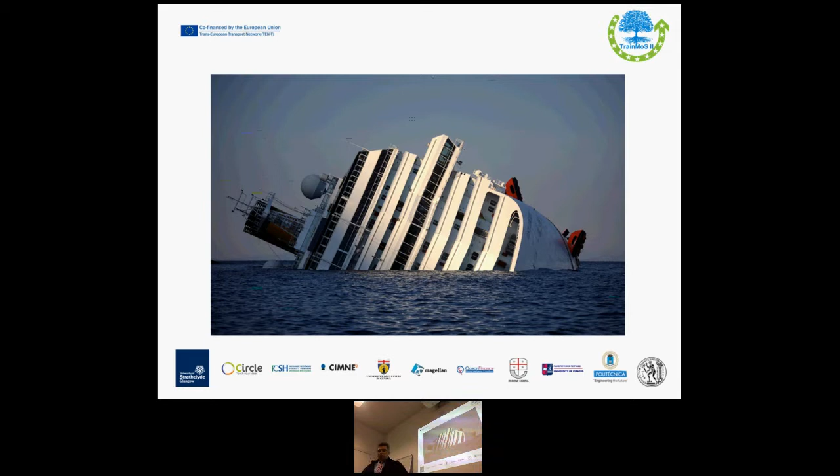In January, the new harmonized probabilistic rules for damage stability became mandatory, and this initiated a new era of rule making in the maritime industry. This actually constitutes the culmination of more than 50 years of work, one of the longest gestation periods of any other safety regulation.

This can be characterized as a step change in the way safety is being addressed and regulated. Taking our time is justified in this case. The change from introducing the new probabilistic rules for damage stability is also fundamental, and it has a lot of design implications which are just beginning to register, driving home the realization that things are no longer the way they used to be.

So these are some of the changes we will see come, and this is what we are going to discuss in detail today. So why damage stability and the behavior of the vessel after damage is important?

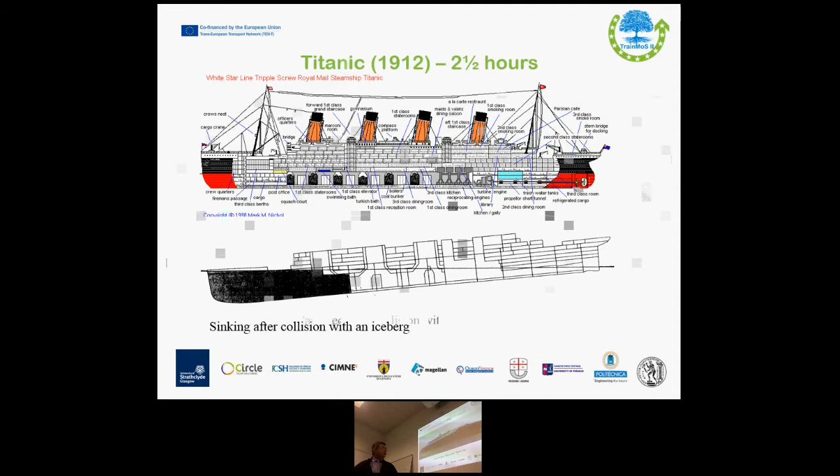In this case, we had the rupture of the hull for more than 4 compartments, and this caused the slow sinking of the vessel. Then in 1956 we had the Andrea Doria, which took 11 hours to sink.

This vessel capsized after a collision with the Stockholm freighter, a cargo ship. Then in 1982, we had the tragic accident of the European Gateway, which took just 10 minutes to capsize after colliding with the Speedlink Vanguard.

This actually showed that these vessels, which have ro-ro decks, are very prone to rapid capsize, and something has to be done in order to save people. In those cases, we need proper design because it's impossible to evacuate the vessel in 10 minutes.

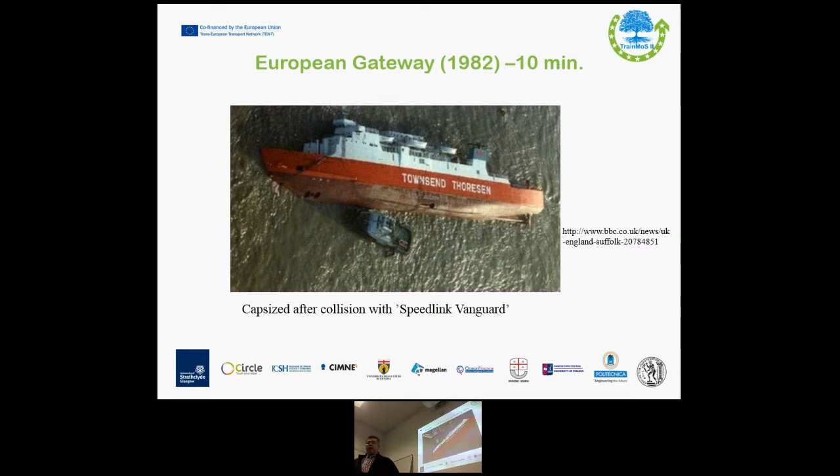Things got even worse. In 1987 we had the Herald of Free Enterprise: from the moment water came into the car deck from the bow door, the vessel was otherwise intact. There was no collision, just water coming in from the bow door, which was left open, and this caused the rapid capsize of the vessel in just 90 seconds.

A few years later, an accident which was also very important for safety and paved the way for new regulations was the Estonia. It happened in September 1994, and it took less than 15 minutes after flooding of the ro-ro deck for this vessel to capsize very rapidly.

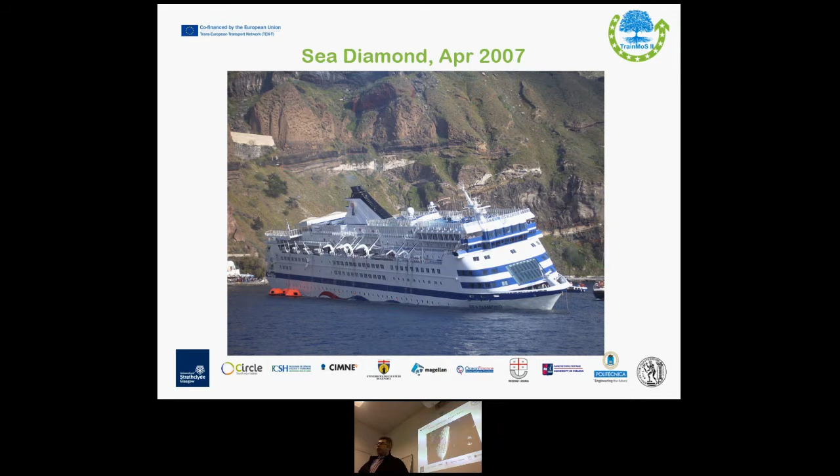And this was another link in the chain of accidents underlining the requirement for better damage stability requirements and better design in order to avoid the consequences of flooding.

So if we go a step back and look at the background, we see that ships, obviously, during their operation may suffer damage, so we cannot avoid this. There is a probability that some of the ships sailing out there will at some point in their life have some kind of damage. Hull damages can be caused by collision, grounding, or enemy action in case of warships.

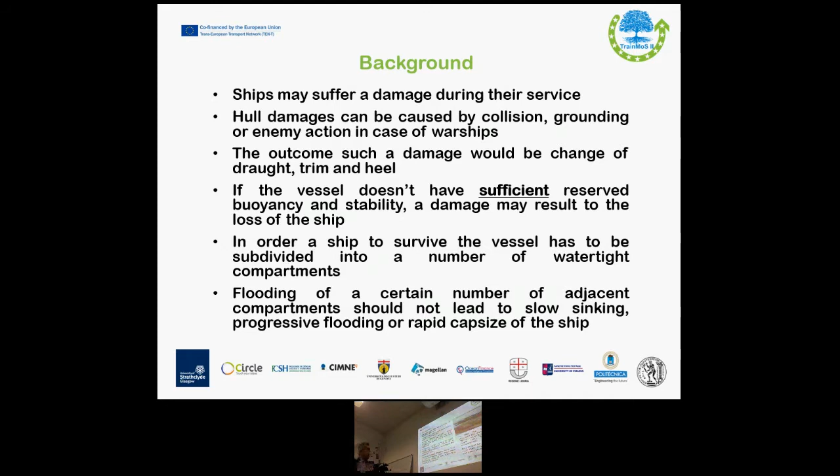If we go back and see when we first understood that watertight subdivision is very important, we will go back more than 1,000 years, because the Chinese junks, which were ocean-going vessels, had already identified the need for subdivision. According to present data, they were subdividing vessels since the 12th century.

The Great Eastern, built by the British engineer Brunel in 1858, was advanced in many different aspects. It was not only watertight subdivided with transverse bulkheads, but it was actually constructed as a double hull, so it was much more advanced in damage stability than other ships in the same era.

At the end of the 19th century in Great Britain, the Parliament chartered a bulkhead committee to investigate the impact of transverse bulkheads, but the first Merchant Shipping Act in 1854 is the first known legal requirement addressing safety at sea concerning watertight bulkheads. In 1891, the bulkhead committee proposed installation of transverse bulkheads in order to make ships longer than 425 feet meet a two-compartment standard. So if there was a breach or damage to one transverse bulkhead, the vessel would still be able to stay afloat.

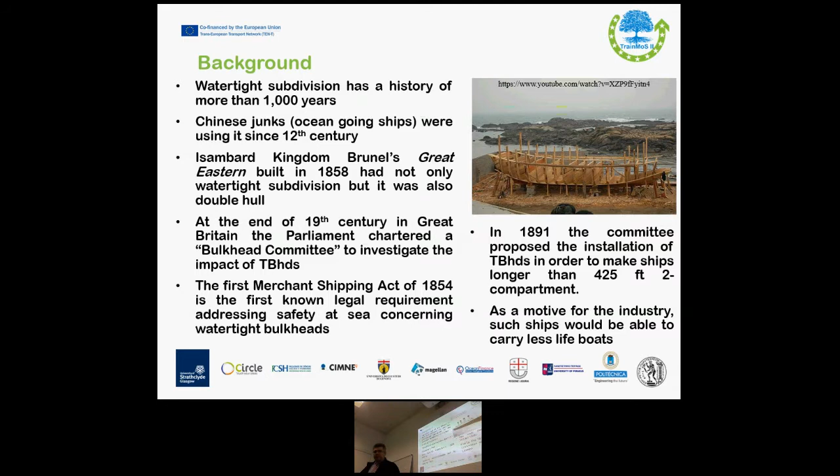The tragic loss of the Titanic in April 1912 stressed the need for international regulations for the watertight subdivision of the hull, and this was covering also the extent up to which the watertight bulkheads were extending.

The problem was, if you see the black, all the sides of the vessel were painted in dark colors, and the reason for this was that these vessels were using coal as fuel. So coaling and refueling, while the vessel was in port, required the coal to be transferred from openings on the sides of the vessel into the stores where it was kept until used.

So you can imagine if it was a light paint outside, what the coal during coaling would cause, how dirty it would look. That's why you see that most of the vessels of that era were using very dark colors for the hull.

So these openings for refueling with coal were one problem for extending the transverse bulkheads to the main deck. There were other issues too. The vertical extent of the bulkheads was an issue which proved to be critical for the Titanic accident.

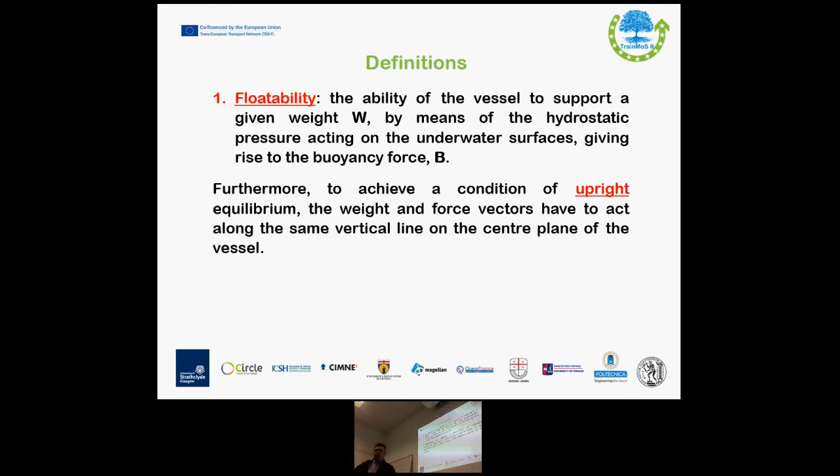Therefore, to achieve a condition of upright equilibrium, the weight and buoyancy force vectors have to act along the same vertical line on the center plane of the vessel. This will give us the equilibrium.

The hydrostatic stability is the ability of the vessel to return to the upright condition in still water when it is disturbed from it. This is a necessary condition: the vessel must have a positive metacentric height.

This is depicted by naval architects as GM. If GM is positive, this is the way to make sure that the vessel has the ability to return to its upright position at small angles. That's why a positive GM is the small angle, initial stability requirement.

If we go to larger angles, then the measure we use as naval architects is the righting lever GZ, and its variation with increasing heel provides a better indication of the hydrostatic stability characteristics of the vessel.

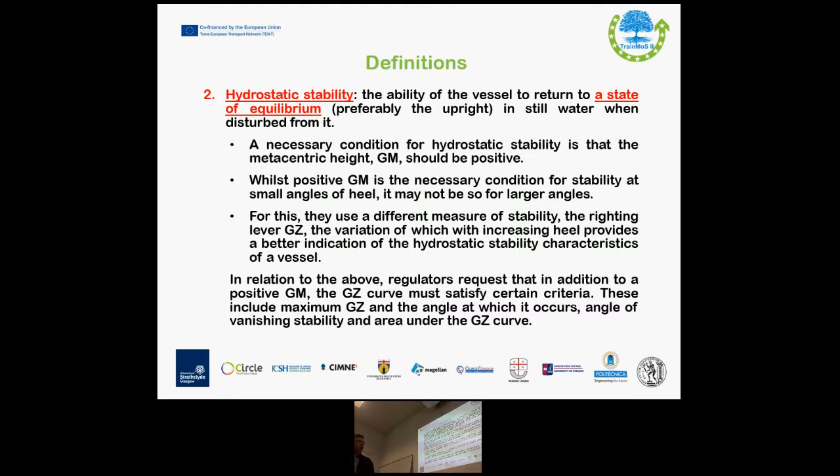So the GZ curve is very critical for the stability of the vessel. If the vessel is damaged, losing part of her internal volume and flooded, she will sink, heel, and trim until she reaches a condition in which the reserve buoyancy, that above the water line, is brought into effect to offset the lost buoyancy, until equilibrium is restored, so that buoyancy and weight are again equal.

For the most onerous damage cases, the GM is likely to decrease and the GZ curve characteristics are likely to diminish in all regards. The vessel will capsize if GM becomes negative while upright, and there are no positive righting levers in the residual GZ curve.

So GM on its own being negative means that the vessel will tend to find an equilibrium away from the upright condition. That means that if we have a GZ curve crossing the horizontal axis at an angle of, say, 2-3 degrees, the vessel will not have an equilibrium at 0 degrees, but will roll between minus and plus this crossing point.

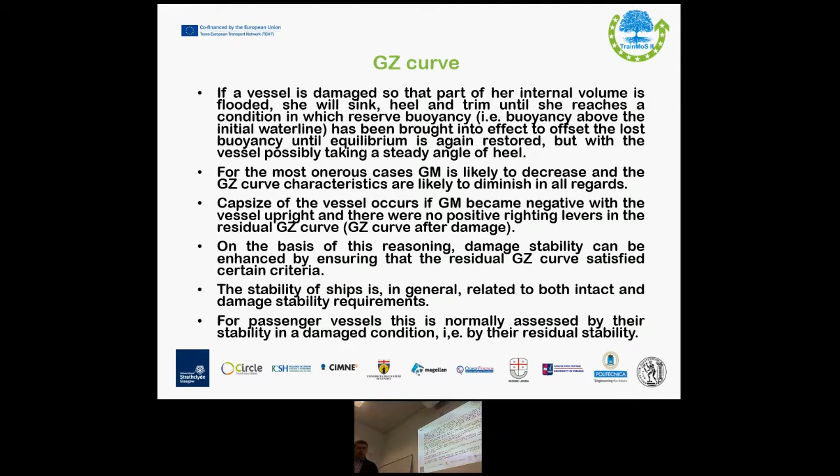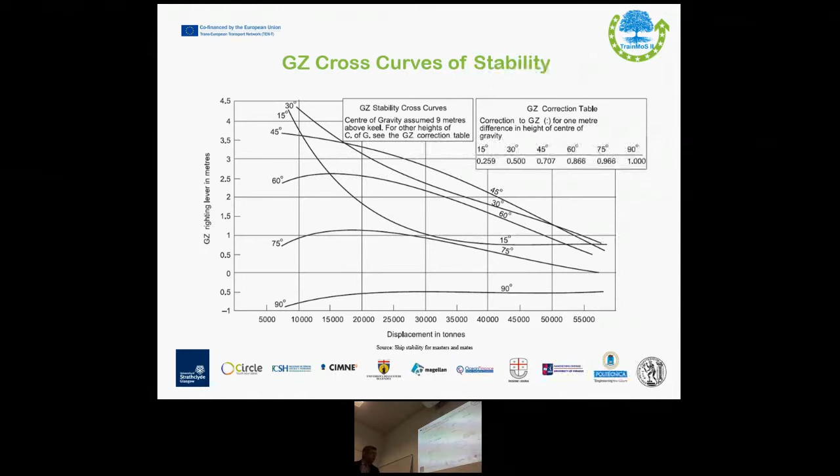If the GM was negative, it could still happen that the 7 degrees rule was satisfied in some cases. If we had asymmetric condition, then we had 15 degrees as the requirement for one compartment damages. If we had 2 compartment or 3 compartment damages, then we could go up to 12 degrees of heel for this inclination. There was no requirement for the area or the maximum value of the GZ phi, so it was only GM.

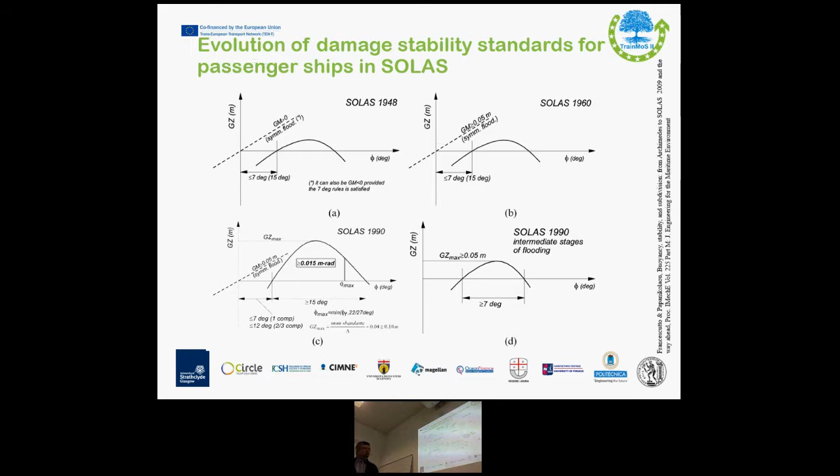The other definitions which we need to have in mind are the watertight bulkheads, the bulkhead deck, the margin line. Actually, the watertight bulkheads are all these boundaries with which we subdivide the watertight envelope of the vessel in the transverse or longitudinal direction. The bulkhead deck is the deck up to which the transverse bulkheads are extended, and the margin line, which was used during the previous deterministic regulations, is a line which is 76 millimeters below the deck at side.

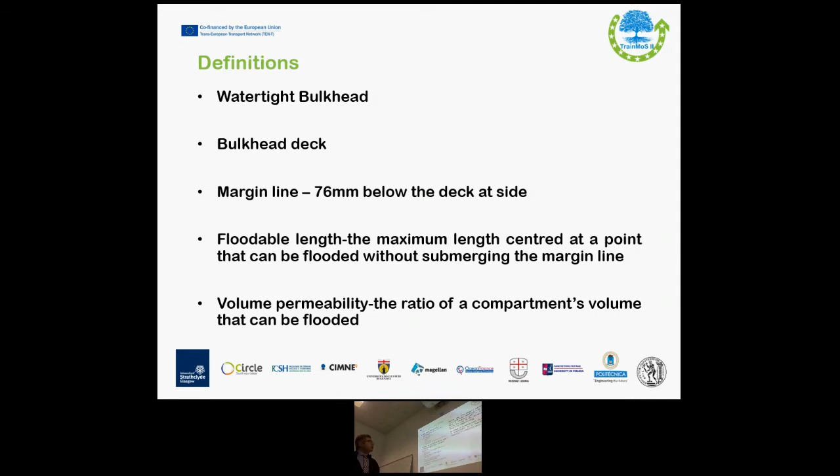For the watertight subdivision, we know that the vessel may sink. It's carrying more weight than her displacement, so there is no balance in the vertical direction. There is flooding due to grounding, collision, enemy action, or operation of a system open to the sea.

So if we have some switches and the valves are open and there is progressive flooding of the engine room, we may have a problem. For case...

When the water finds its way in, the designer has to make sure that the loss of transverse stability is minimum, the damage to the cargo is minimum, the vessel has sufficient longitudinal stability, and the loss of residual buoyancy is minimum. Ideally, the vessel should sustain more and more flooding without loss of stability until it sinks bodily by loss of its reserve buoyancy.

So this is the fail-safe case. If we cannot save the vessel, we should make certain that it will not lose its stability rapidly and capsize, because that means the number of fatalities will increase. To achieve this, the ship is subdivided into a number of watertight bulkheads, watertight compartments. This is the ideal way of sinking - if we cannot save the vessel, it should go down low.

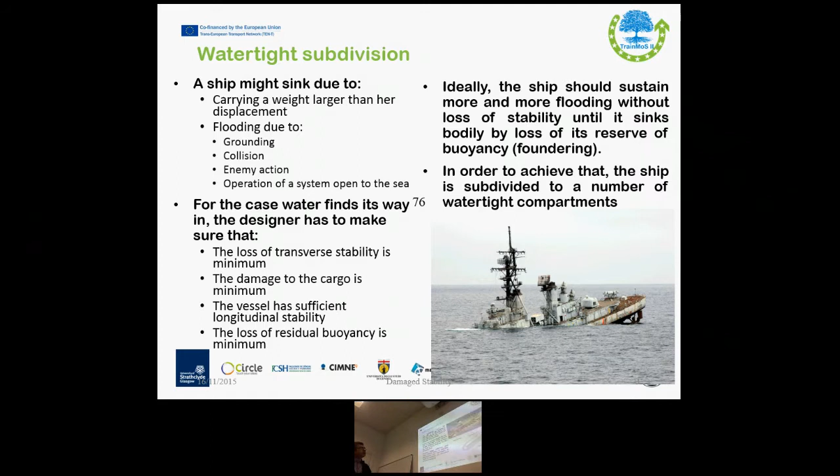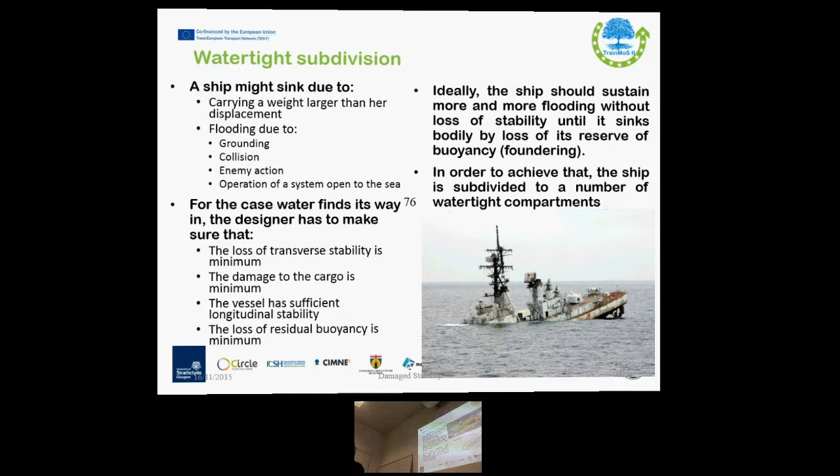For the subdivision, the bulkheads must be watertight up to the bulkhead deck and able to withstand the water pressure when subject to a different waterline from that of the intact vessel. So if the water level in a compartment increases, the bulkhead should have sufficient strength.

Ships over a certain length should have a watertight inner bottom, extending from the forward collision bulkhead up to the aft peak bulkhead. For tankers, large warships, and many ro-ros, we have in addition longitudinal bulkheads in order to minimize the transverse extent of flooding. So we have this in some vessels.

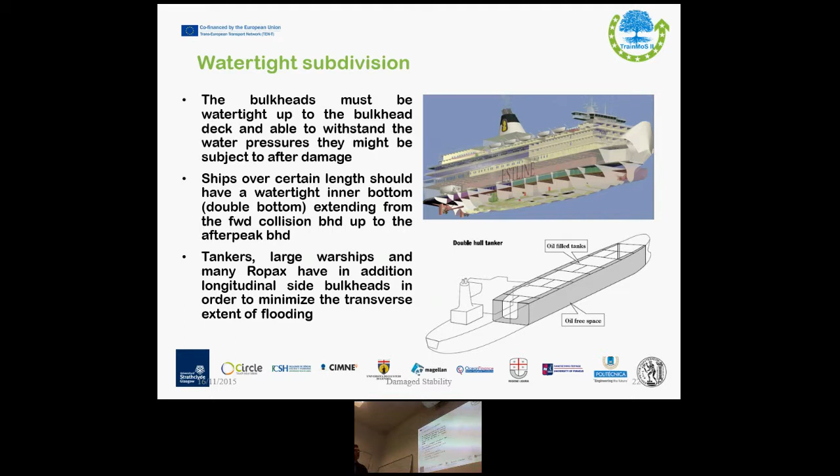So, to assess the ability of the ship to withstand damage, a number of damage scenarios should be checked at the design stage. For every damage condition, the naval architect is checking the damaged waterline, the heel and trim of the vessel, and the damage stability according to the standards laid down by the rules. When the ship is damaged...

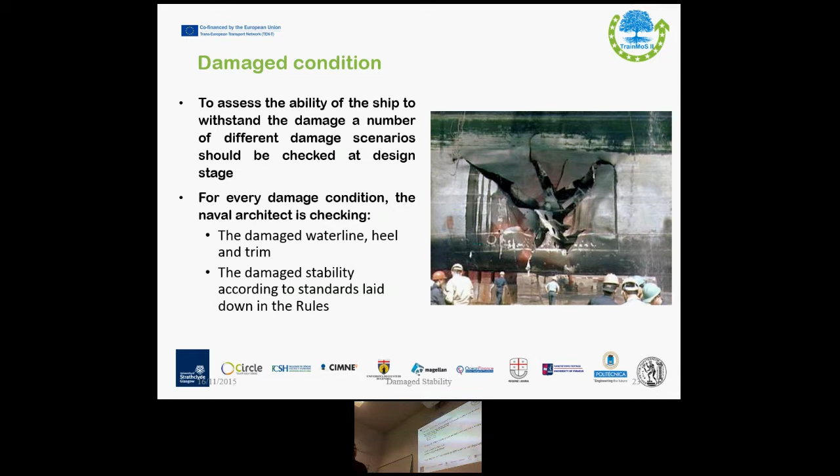The water enters, and this results, as we said, in increase in draft, change in trim, change in heel. The result of this flooding can be determined by two ways - that's what we are using in naval architecture.

We have the lost buoyancy method and the added weight method. The regulations usually rely on the lost buoyancy method because this is a constant displacement method - we assume that the vessel is losing buoyancy, but the weight stays the same. This is much easier in order to use all these non-dimensional indicators which we have.

Also, because GM is a moment, and it comes from the heeling moment, the righting moment - if we have moments, we have to divide them by a weight. If the weight changes, then we will get different numbers for the GM, and this will make things much more complicated. So we are using the lost buoyancy method.

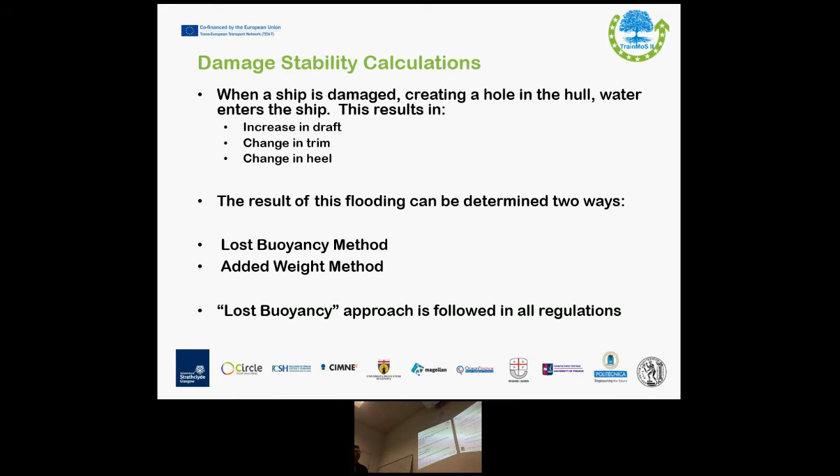And this is a very simple example in order to understand how it works. This was first presented in the handbook of ship design, the German Handbuch der Werften, and it's also used by Watson. The starting point is, we have a barge, and the starting point is the intact condition of the barge.

We see with 0, we indicate the intact hull, and the original draft is T0. Then we have, at this draft, the volume of the barge is V0, and associated with the initial intact stability, we have the GM at this intact condition, which is by definition KB plus BM minus KG.

So these are the metacentric radius, the vertical center of buoyancy, and we subtract the vertical center of gravity.

After the damage, we have a hole. So this buoyancy, which existed underneath the initial draft, instantly is lost - this part is not contributing to the buoyancy of the vessel anymore. So the draft has to increase.

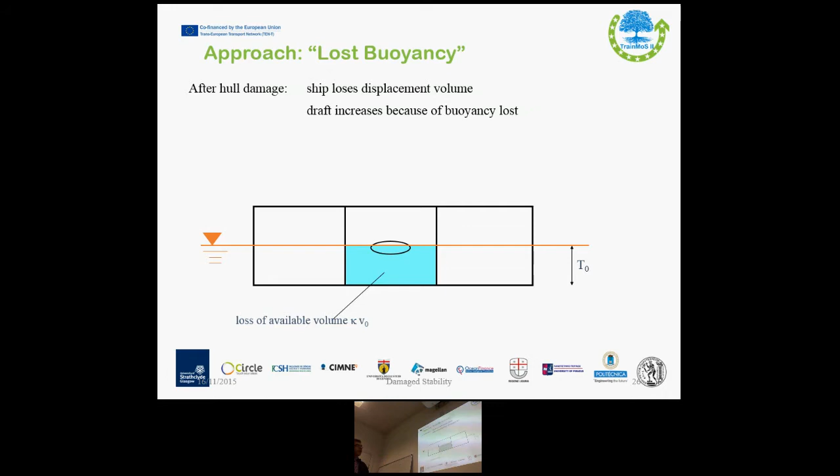So the lost volume is κ, which is the permeability times V0, the volume of this compartment. The flooded compartment does not fill completely with water because the compartments usually contain equipment, furniture, structural components, or cargo, and this is why we have the permeability, which is defined by the available volume to be flooded divided by the total volume which the compartment has.

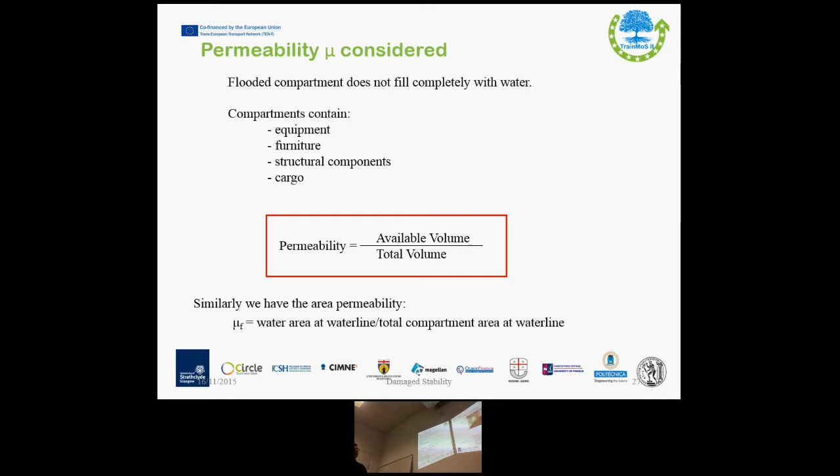Let's say, ideally, if it was free of all these obstacles. Similarly, we have the area permeability, which we use sometimes for the waterline calculations. So the assumption in the calculations usually is that we have a homogeneous permeability to the vessel - let's say if we had an empty room, it would be just the walls, no obstructions there.

In reality, we have permeability of 95%, let's say, in this room, but inside we have furniture, and there is a different distribution vertically. If you have a water line where water steps in, the permeability of the lower spaces is different from the permeability at the upper part of the compartment. Our model suggests that we have this homogeneously, so in all the different heights of the compartment, the permeability will be the same.

The typical values are shown in this table. For a merchant ship, it's 95% for the compartment. The accommodation space is 95%, since these are empty spaces. For machinery spaces, typically we have 85% of the total volume available for flooding. The dry cargo space is 70%, and bunker stores and cargo holds are 60%.

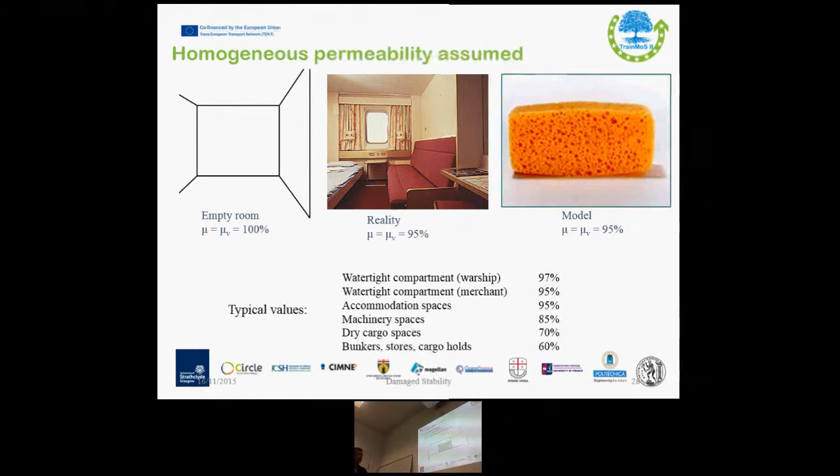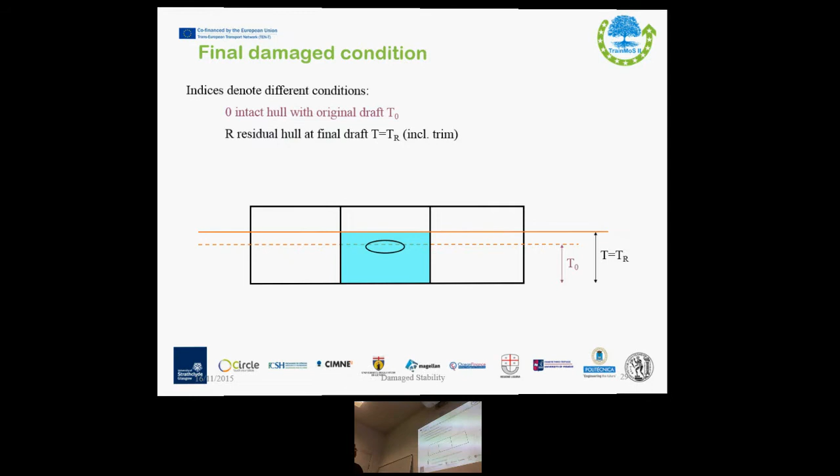In the final damage condition, due to this opening we lose some buoyancy, so the draft will increase. We could even have some trim if this was not a symmetrical condition. In this case, let's assume a symmetrical damage in the longitudinal direction that extends from one side to the other, so there is no heel and no trim. The intact draft at the final condition can be an artificial intact damage condition, used for mathematical derivations, but it has no actual meaning—it's something we need to use to come up with the numbers for the calculations.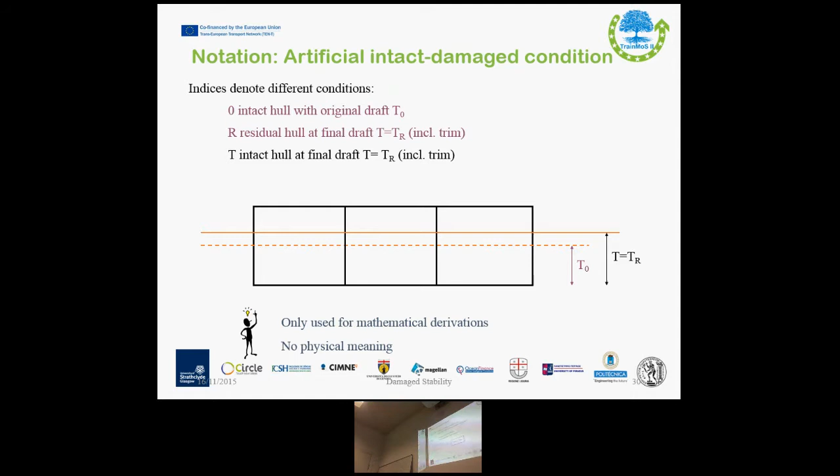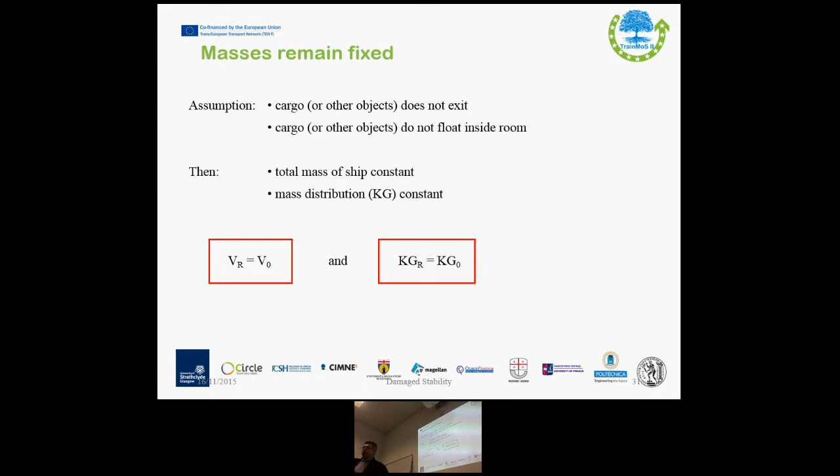The masses are fixed—this is an assumption we have. The cargo or other objects will not exit, and the cargo or other objects will not float inside the room. These are assumptions in the damage stability calculations, and the total mass of the ship is constant, meaning the mass distribution will also be constant. So the volume, the displacement of the weight of the ship needed to find equilibrium, will be exactly the same before and after the damage, and the vertical center of gravity will remain the same. So from the weight distribution, we have no changes.

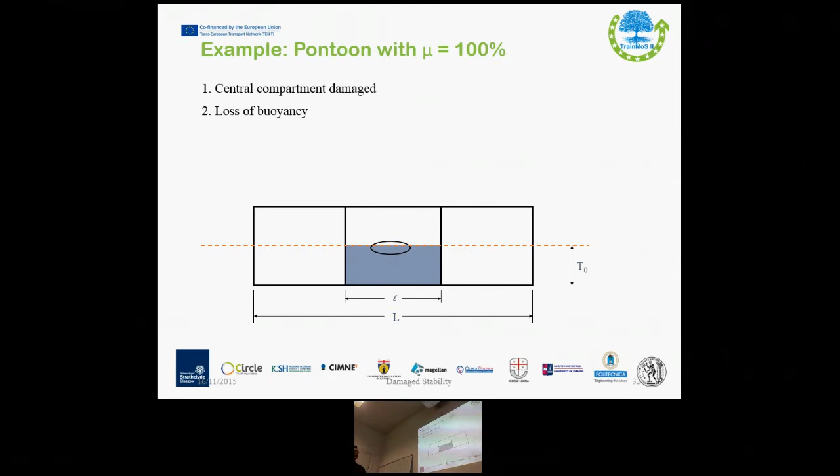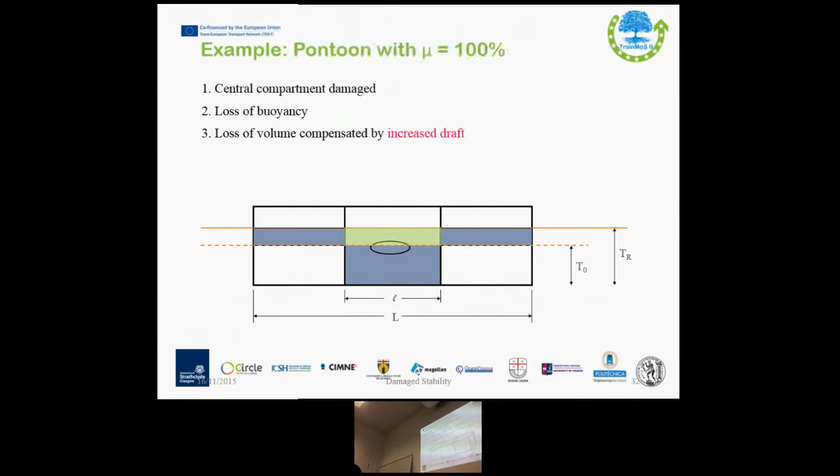Let's see an example with a pontoon with a permeability of 100%. We have the length of the pontoon, the length of each compartment, and the initial draft T0—these are the parameters we need. We have a central compartment damage, and we lose buoyancy, where the lost volume is compensated by the increased draft. Let's see what is actually happening here.

For the intact stability, assume these dimensions for the pontoon: a length of 100 meters, the length of the damaged compartment is 40 meters, the draft is 3, the beam is 20, and the assumed vertical center of gravity is 8 meters. The volume, according to these dimensions, is 6,000 cubic meters. The vertical center of buoyancy is located 1.5 meters above the keel, and BM is by definition equal to the inertia of the water plane area divided by the volume.

For this simple geometry, a rectangle waterline, we can easily calculate the moment of inertia, which is L times the breadth cubed divided by 12. Then we divide this by the volume, which for this box is simply length times breadth times draft. Doing these calculations, we find 11.11 meters. Then we can easily calculate the GM, which with this vertical center of gravity will be 4.61 meters.

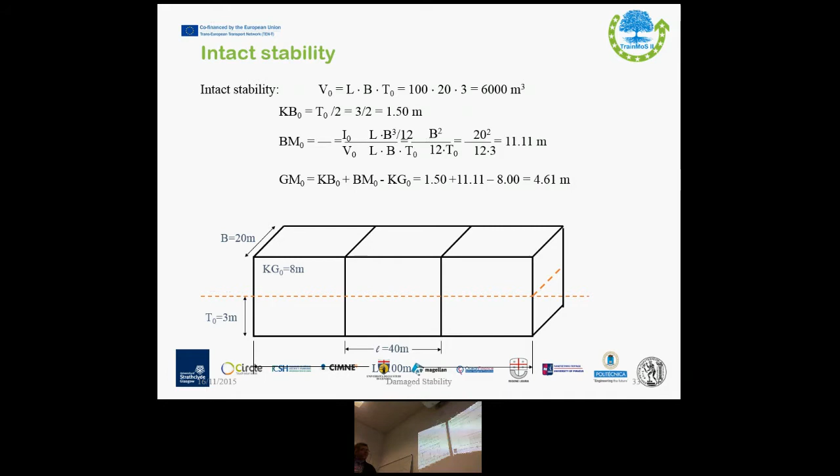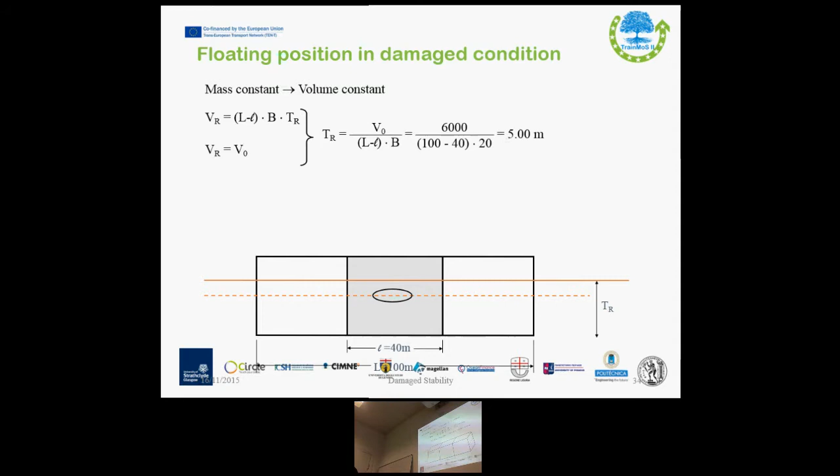With the assumption that the mass is constant, we need the same volume to balance the weight, which means the new draft will be 5 meters. So we started with a draft of 3, and due to the lost buoyancy in the center compartment, we ended up with a new draft after damage of 5 meters.

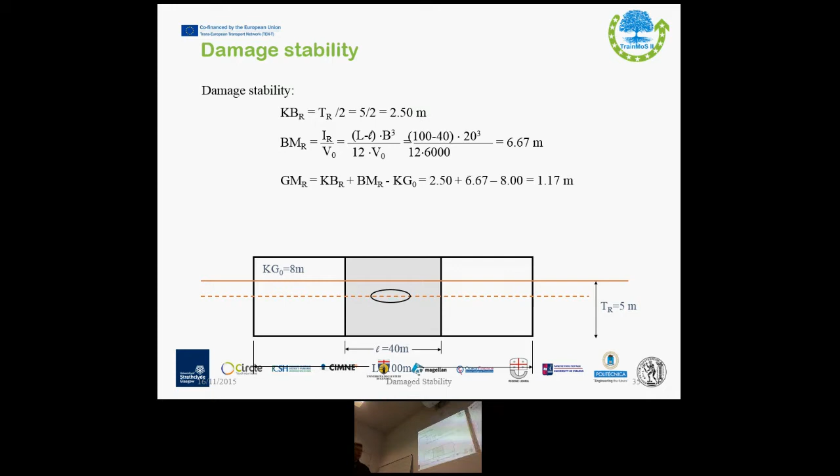If we do the same calculations for the vessel in this damage case, we do exactly the same, but now having lost this central part, the new GM after damage will be just 1.17 meters. This is a comparison: you see very quickly that the pontoon is still stable, but due to this damage, it lost almost 3.5 meters of GM.

Another interesting thing is the intermediate condition, where we have some water coming in. So we haven't lost all the buoyancy here, but part of this damaged compartment is flooded. In this example, we have a height of flood water of 1.5 meters inside the damaged compartment, and at this intermediate stage, the draft is, according to the same calculations, 3.6 meters.

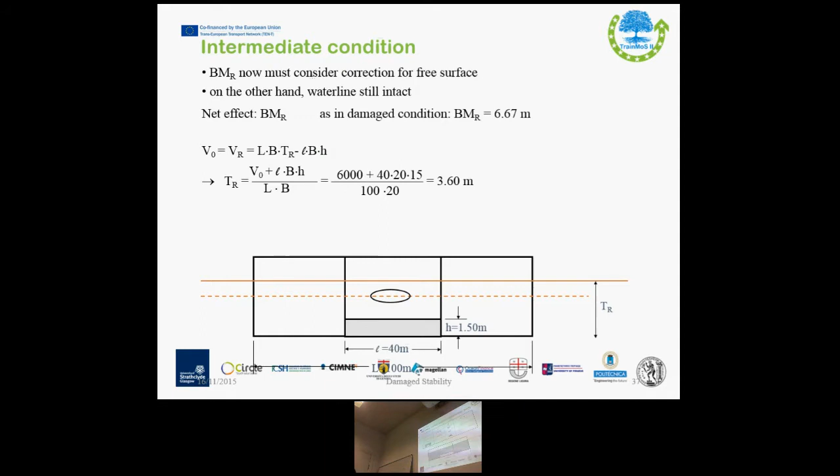If we do the calculations for the various volumes which we have, we can easily calculate the resulting vertical center of buoyancy using the moments. We have the volume, we have the vertical moments of this volume according to the centers we have, and dividing this moment by this volume, we will find the KB, the vertical center of buoyancy, in this intermediate condition.

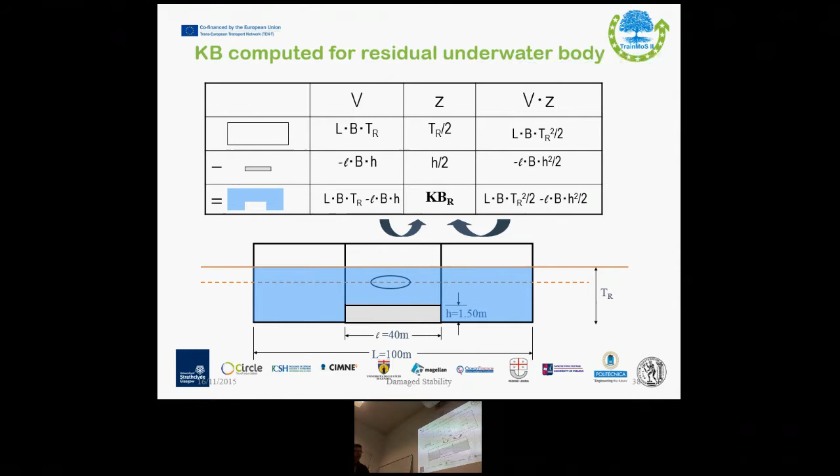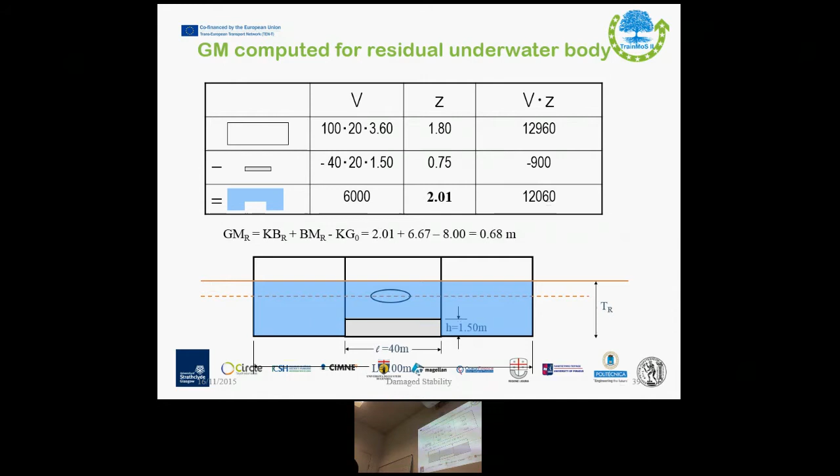Doing the maths, we find that the vertical center of buoyancy is 2.01 meters above keel, and substituting this value in our calculations, we see that the GM is now only 0.68 meters. This is what the comparison shows: the intact vessel started with a huge GM of 4.61 meters. The damaged vessel will end up with a GM of 1.17 meters, but in the intermediate stages we have just 0.68 meters left.

So the pontoon is still stable, but the GM is considerably lower than in the final condition, and the intermediate stages can be more critical than the final. In the old days, the regulations required stability proof only in the final condition. Nowadays, it becomes much more important what happens in the intermediate stages.

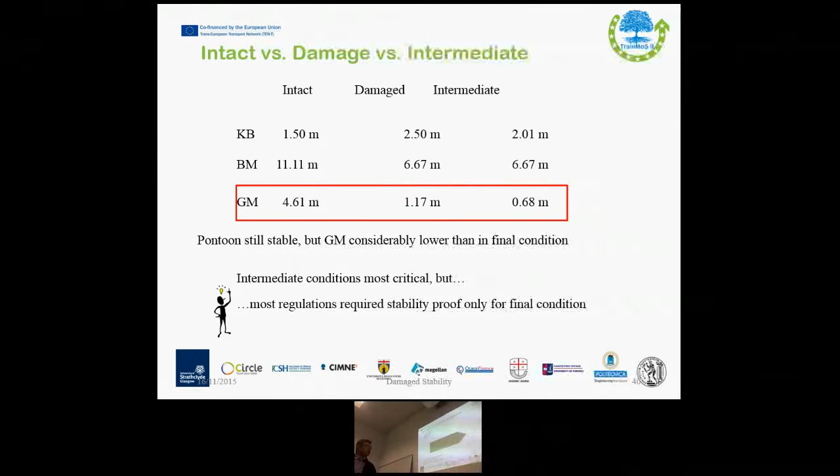Now something to break the symmetry: see what happens if the vessel has an asymmetrical damage. Then we will have changes not only to the draft, but also to the trim and the heel. In this case, we see a damage which happens in a compartment that is asymmetrical, on the port side of the vessel, and what will happen?

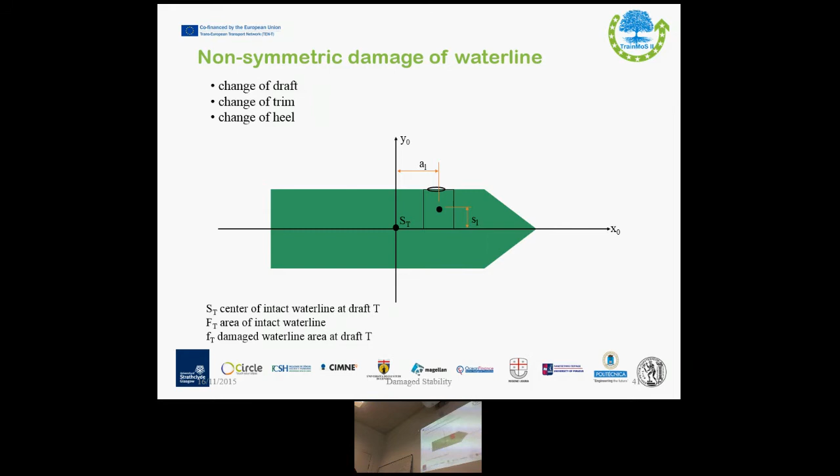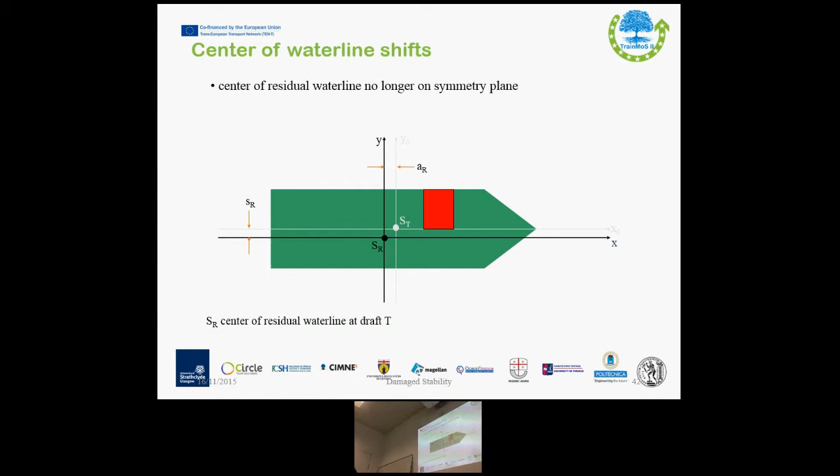We will lose this part, and this will cause the center of the residual water line to move to a new position from its initial location, moving to compensate for this loss. Not only this, but this asymmetry will change the main axis of inertia, the axis with the minimum moment of inertia, and this will no longer be the symmetrical plane. So all the rotations of the vessel will be around this new axis, which is rotated slightly to compensate for this loss.

Another interesting notion is the floodable length, a simplified model concept which naval architects were using when it was very difficult for damage stability calculations to be done. Everything was done by hand, and designers wanted some initial estimations of where to put the damage control transverse bulkheads.

The floodable length is something easy to handle. In the old days you could do that with no computer; nowadays we can do it with a simple spreadsheet. You don't have to use a dedicated program, although most naval architecture programs provide this facility. The assumption is that there is constant permeability over a cross section, which often is not true. In general, you should remember this is only an approximation, a prehistoric approach, we could say.

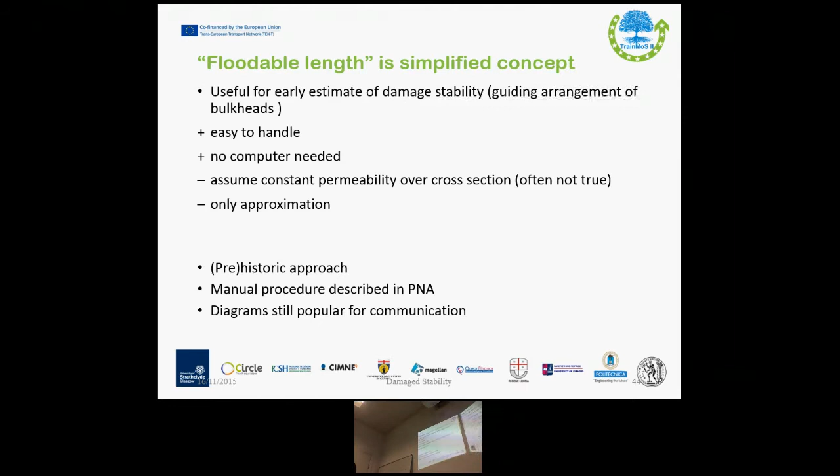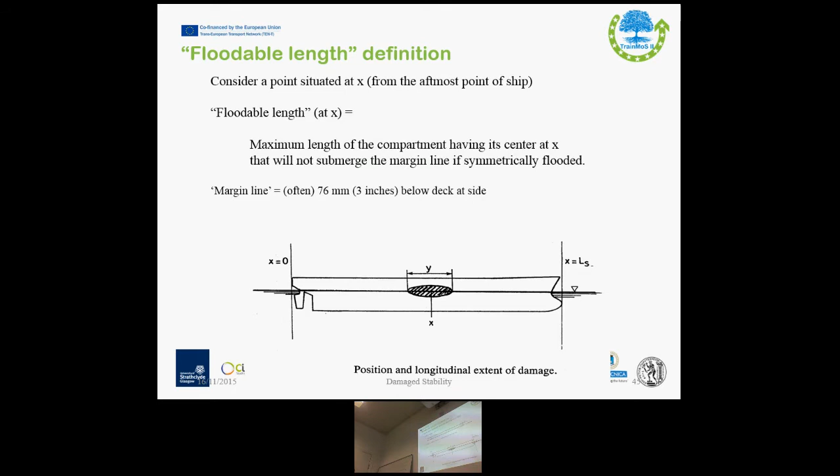The procedure is described in the Principles of Naval Architecture, the well-known PNA, and the diagrams are still popular because they provide a very good way of communicating things. The definition of floodable length is the maximum length of a compartment, having its center at position X, which if damaged will not cause the margin line to submerge, assuming symmetrical flooding. The margin line is located 3 inches below the deck at side.

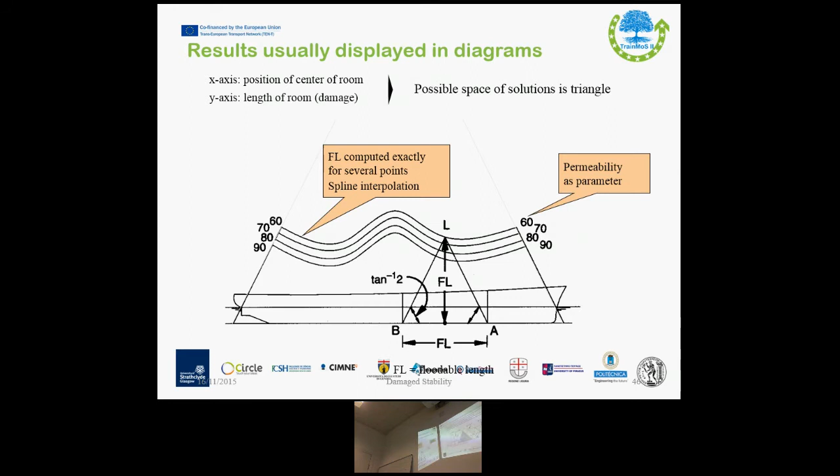What we were doing, we were calculating various points, and then we were interpolating this with different methods, for instance, spline interpolation used. If we have an actual vessel, then you see that in this case there will be, according to the permeability of the various spaces, different curves which can be used, stopping at its bulkhead.

And what the naval architect has to make sure is that the naval architect will place the transverse bulkheads at these locations in such a way that the triangles formed here will all have the top corners below the certain curves, which are, let's say, ruling this part.

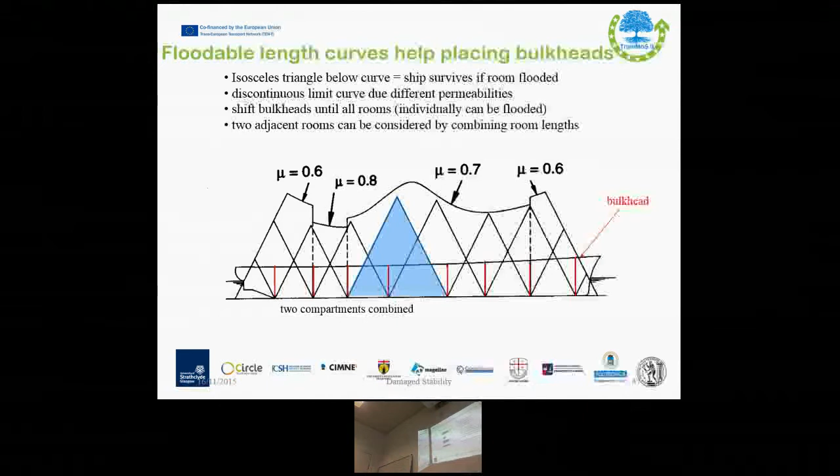We use today computer programs in order to make our life easier, and the naval architect for its damage condition specifies the hull geometry, the mass distribution, the compartments, and the computer determines the floating position, the residual GM and freeboard for all individual compartments and groups of compartments.

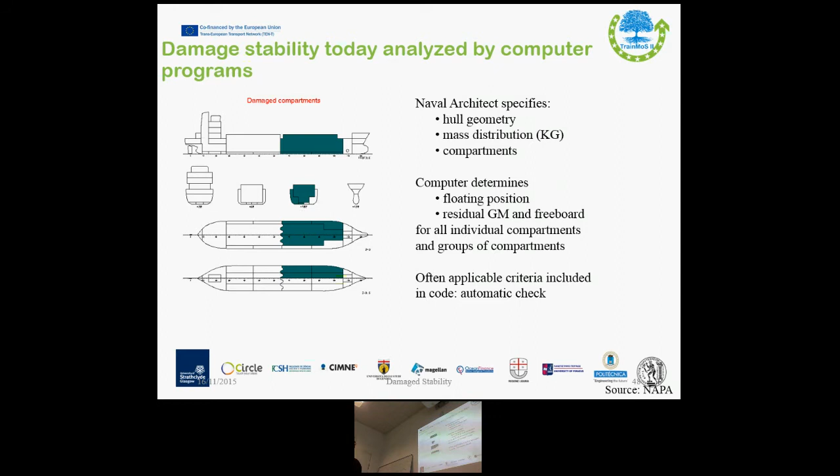And often the applicable criteria are included in the code, so you can do an automatic check. Otherwise, the naval architect, the designer, has to check whether the criteria are fulfilled. And we have two types of criteria.

We have the deterministic ones, where we have standard dimensions of damage used, extending anywhere along the ship's length or between two transverse bulkheads, depending on the relevant requirements. And we have a number of standard damages involving single or multiple compartments to be examined. So we have predefined cases according to the maximum extent of damage.

Each damage case is to be considered for each loading condition, and the applicable criteria are to which this case has to do with. So if we have a two-compartment damage, we will take all the two-compartment damages for this vessel, and we'll see which is the worst condition, and we will see if in this worst condition the vessel meets the criteria, then it will pass.

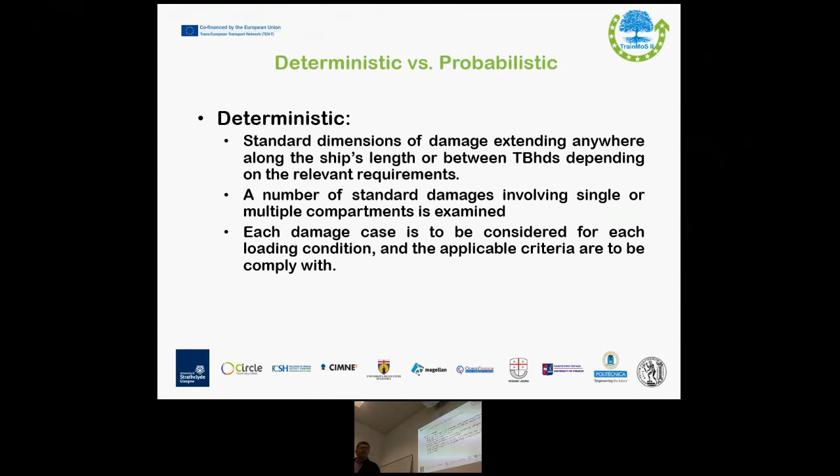On the other hand, for the probabilistic approach, we don't care for each specific condition as such. We are interested in the survival after damage, which is the measure of the ship safety, and this is referred to as the attained subdivision index.

The philosophy behind the probabilistic concept is that two different ships with the same attained index are equally safe, and therefore there is no need for special treatment of specific parts of the vessel, even if they are able to survive different damages. The only areas given special attention in the regulations are the forward and bottom regions, which are dealt with by special subdivision rules, provided for cases of ramming or grounding.

The probabilistic concept affords new degrees of freedom in ship subdivision and layout, but in this process, designers are finding it rather difficult to move away from the deterministic mindset, so they have to readjust.

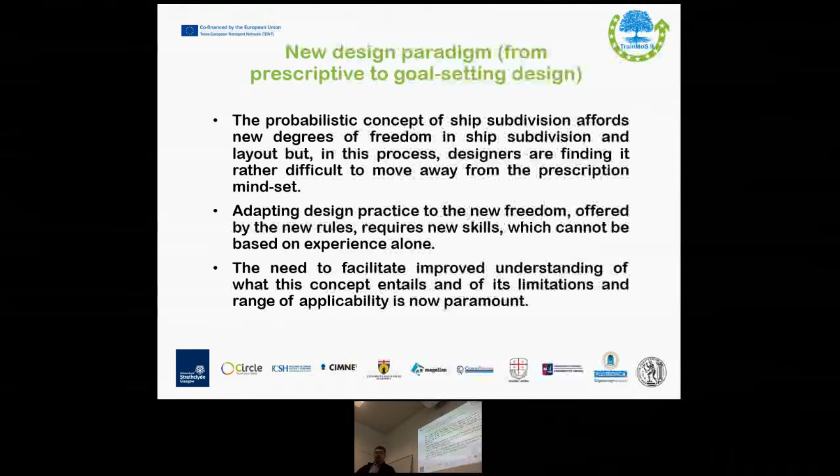Adapting design practice to the new freedom offered by new rules obviously requires new skills, which cannot be based on experience alone. They need to facilitate improved understanding of what this concept entails, and its limitation and range of applicability is now paramount.

With the advent of the new probabilistic rules, there is a major shift in the way naval architects are performing the calculations for floatability and stability, and how they interpret those terms.

The margin line is removed from SOLAS 2009, which we will see later on, and the naval architect begins to take into consideration the superstructure, seeking to identify and distribute the watertight spaces so that the floatability and the stability are ensured in all the extreme damage scenarios covered by the probabilistic rules.

And there is consideration for the upper decks for stability needs, which lead to accounting for all spaces, openings, escape routes, void spaces, and layout. And this is actually affecting the way the ship is operated.

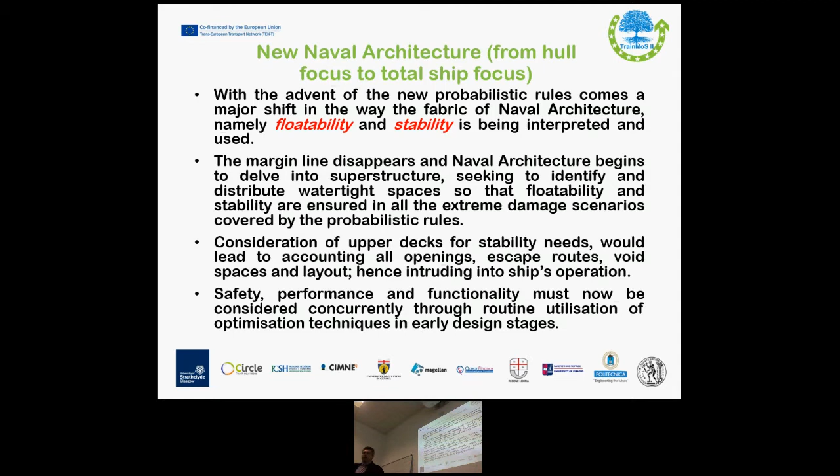There is safety, performance, and functionality, which must be considered now through the routine utilization of optimization techniques in early design stages. And the new rules of the game.

So there was a discussion when SOLAS 2009 was discussed. The requirement from IMO was that the new probabilistic concept will offer exactly the same, the equivalent safety that SOLAS 90 and the Stockholm Agreement in Europe were offering. And in that respect, the calibration for SOLAS 2009 has been done based on SOLAS 90, which was a deterministic concept.

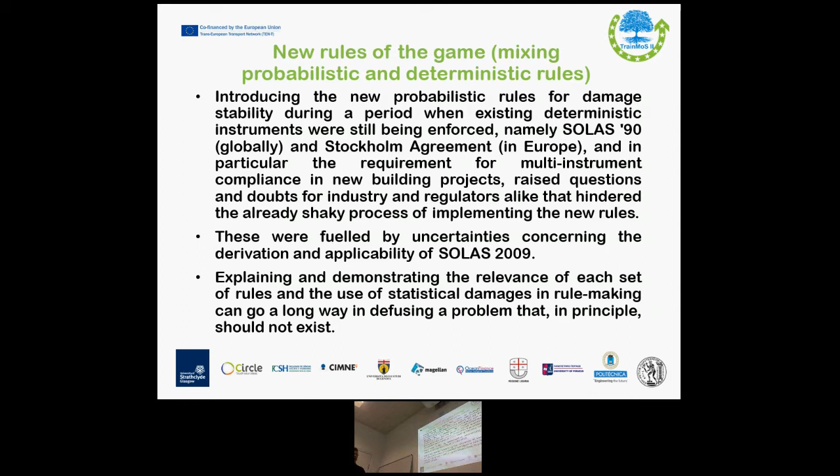This calibration fueled some uncertainties concerning the derivation and applicability of SOLAS 2009, explaining and demonstrating the relevance of each set of rules and the use of statistical damages in rule making is required. As a principle, these shadows in how the rules have actually been developed and what they represent should not exist. In that respect, there was the intention to provide a quantitative assessment of safety. A safety index might have been enough at the time the probabilistic framework for damage stability was conceived.

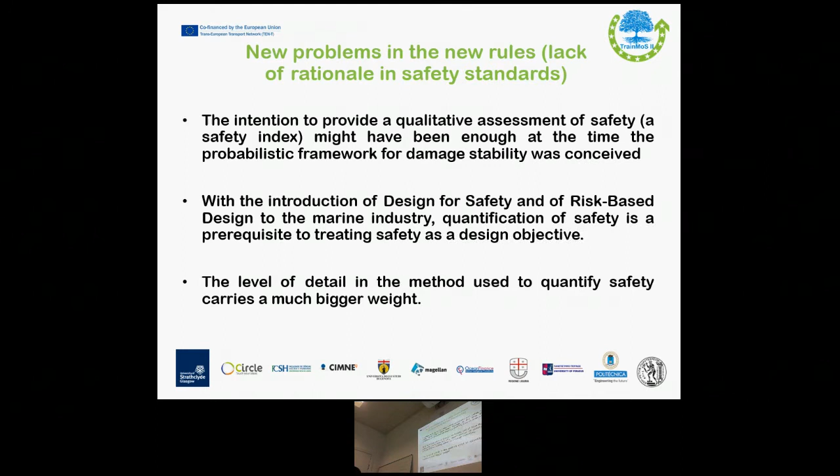With the introduction of design for safety and risk-based design to the maritime industry, there was a quantification of safety, which is a prerequisite, and we should now treat safety as a design objective. The level of detail in the method used is also important to quantify safety, and this carries a much bigger weight.

So the new problems in the new rules are that the main issue with SOLAS 2009 and the probabilistic concept is how we calculate the survival factors, and this should be done in a consistent and accurate way. Some research work that has been done raised concerns about the S factor, as we call it, and this created a lot of discussion within the IMO and the international community.

And in that respect, it was decided that the European Commission funded project GOALDS was launched in September 2009 to address all these problems and explain the current pitfalls in the rules, providing a way forward of how to deal with them.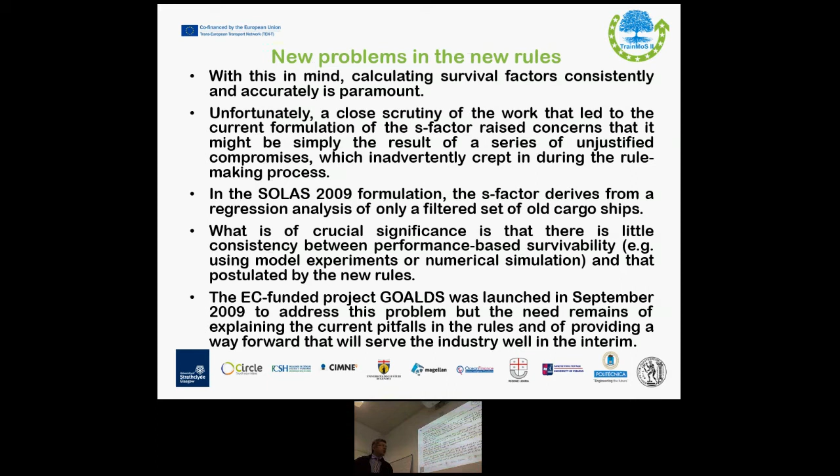Let me point out here that some of the criticism for the SOLAS 2009 formulation is that the S factor derives from the regression analysis of only a filtered set of old cargo ships. So there was discussion there. Also, nowadays we have a lot of new ways of addressing this survivability - we can do model tests or numerical simulations, and this was not taken into consideration when SOLAS 2009 came into force.

The attained index reflects the average survivability of the vessel following collision damage and flooding in a seaway, and as such, an accurate calculation of the survival probability in the probabilistic rules is of paramount importance.

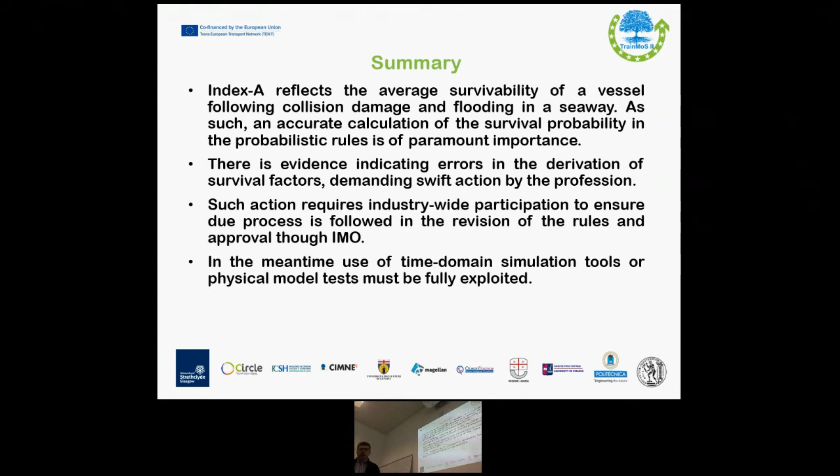There is evidence that there are errors in the derivation of the survival factors, demanding swift action by the international community, and such actions require industry-wide participation to ensure due process is followed in the revision of the rules and approval through IMO. In the meantime, the use of time domain simulation tools and physical model tests is also very important, and we will visit this in our course later on.

The new damage stability standard has a statistical rather than performance-based nature and may not cater to the higher level of safety expected in mega ships of today. The FSA, formal safety assessment studies that have been performed in another EU funded European Commission project, SAFEDOR, demonstrated the need to raise substantially the damage survivability of large passenger vessels.

Equally important are the recent innovative new building projects that have shown considerable potential for raising the damage survivability standards. So it has been proven that designers still have the capability of increasing the safety level of the designs.

The first probabilistic concept was proposed by Kurt Wendel back in the 60s. This then came into force as equivalent to the deterministic approach with SOLAS 74, done through resolution A265. The next major step was in 1992, where for the first time probabilistic standards were applied to cargo vessels with the same principles as the 74 regulations.

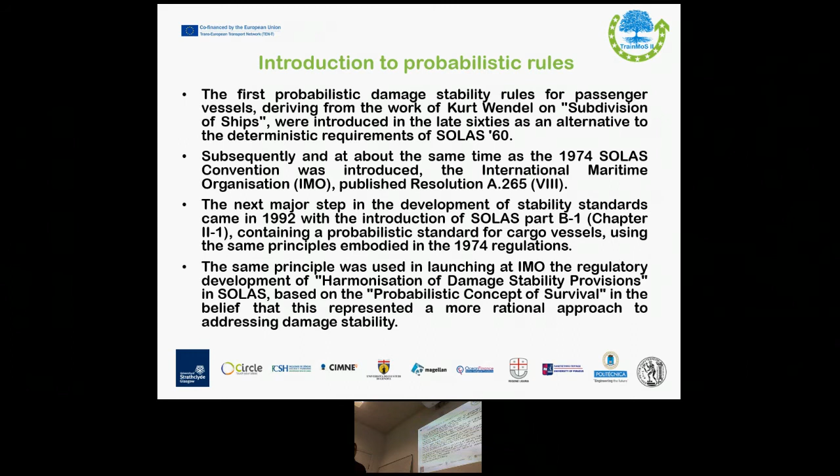And then we have the probabilistic concept of survival with the harmonization of damage stability provisions in SOLAS, which we will see later on in this series of lectures.

The evidence, however, of this common sense driving rule making is very scarce, with accidents providing the main motivation for rule making. Emphasis has primarily been placed on reducing the consequences, that is, on the cure rather than prevention.

Against this background, it's widely believed that the prevailing situation could be drastically improved through understanding of the underlying mechanisms leading to vessel loss, and identification of the governing design and operation parameters to target risk reduction cost-effectively. This in turn necessitates the development of appropriate methods, tools, and techniques which are capable and meaningful of addressing the physical phenomena involved.

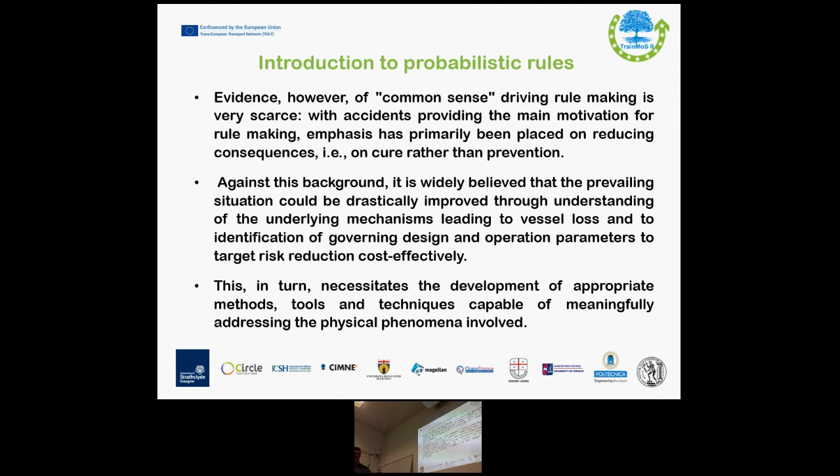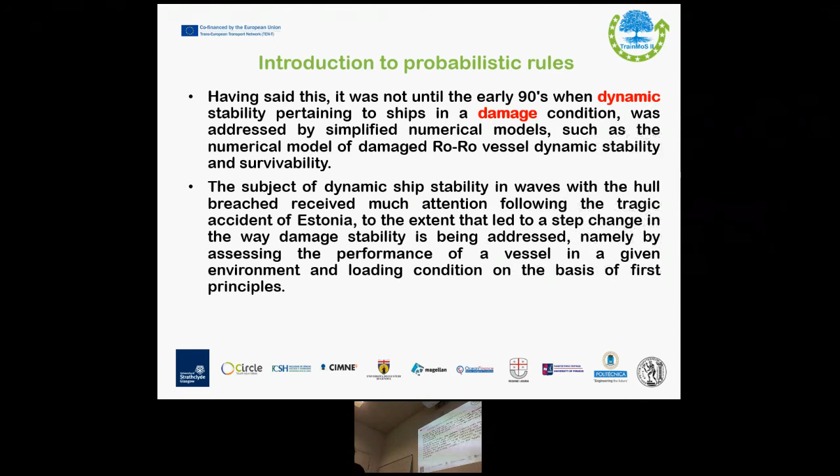It was not until the early 90s that the dynamic stability pertaining to ships in the damaged condition was addressed by simplified numerical models, such as numerical models of the damaged ro-ro vessel, dynamic stability and survivability. The subject of dynamic stability in waves got a lot of focus after the tragic accident of Estonia, which led to a step change as we had to incorporate dynamics, including water on deck.

Then we have a number of projects, including the project Harder, which paved the way and studied the design of cargo and passenger ships and the growing appreciation of deeply embedded problems in both rules and harmonization itself. This dates back to 2000 when this project took place. The overriding goal was to develop a rational procedure for probabilistic damage stability assessment, addressing from first principles all relevant aspects and underlying physical phenomena for all types of ships and damage scenarios.

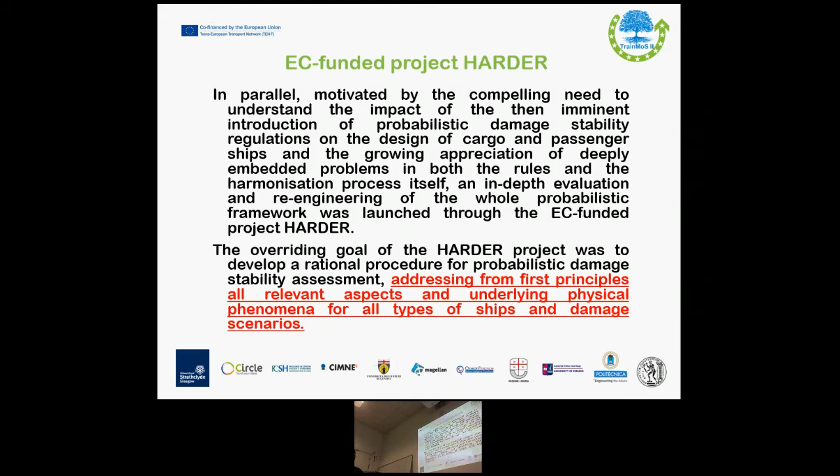It was not only Harder that paved the way. Other EU projects such as Nereus, ROROPROB, and SAFENVSHIP have other collaboration methods. IMO has done similar work, trying to create a clearer understanding of damage stability, which increased our confidence in the available knowledge and tools addressing this problem, and also gave the designer new ways of addressing this issue.

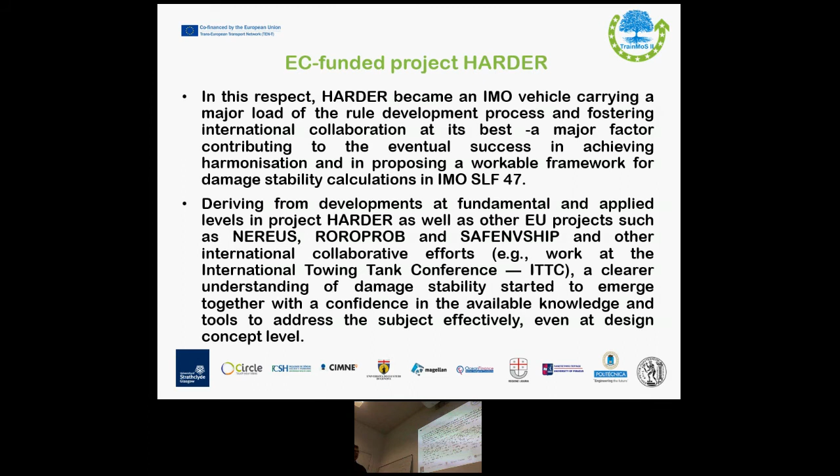More importantly, the knowledge which we gained here passed to the regulatory instruments, and this created new and better methodologies to safeguard against design deficiencies in the first instance, until safer designs evolved to reflect this knowledge.

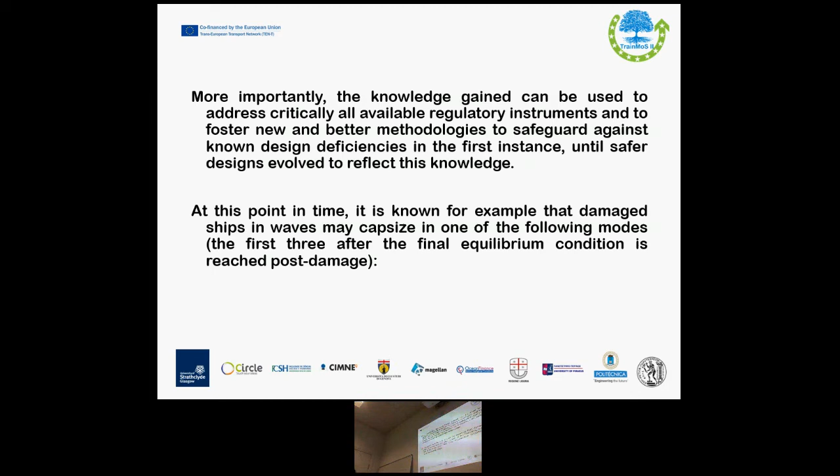At this point, we know that damaged ships in waves may capsize in one of the following modes. For high freeboard ships, provided they have some minimum positive righting lever and range of stability, the ship will not capsize in moderate waves.

Wave impacts on the side of the ship will induce some rolling in marginally stable cases, which could result in capsize at larger sea states. Often ships are more vulnerable with damage in leeward, since the GZ levers are typically less in the damage direction, and the induced dynamic roll is typically somewhat greater leeward.

If we have a low freeboard ro-ro ship, and the wave action gradually pumps water onto the vehicle deck, the height of the water increases, and the stability will deteriorate, and the vessel may capsize to windward.

In some rare cases, ro-ro vessels may heel leeward after the first few wave encounters, with insufficient freeboard on the weather side to prevent further water accumulation, and the ship will continue to take water on the vehicle deck until a capsize results.

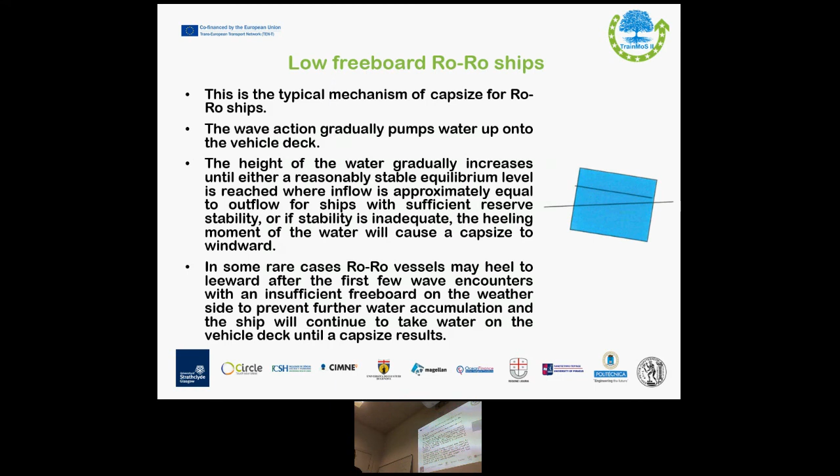For low freeboard conventional ships, this is the typical mechanism of capsize for non-ro-ro ships. The highest waves will form boarding seas, and they will pile up on the windward side of the deck, inducing roll and capsize usually to windward.

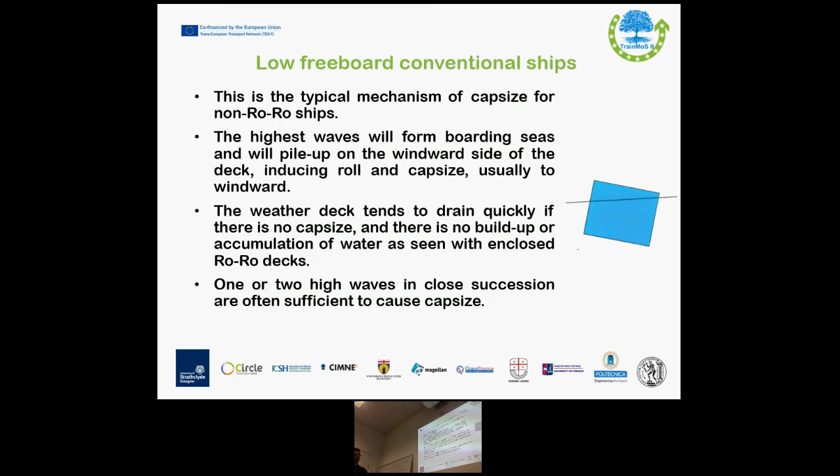The weather deck tends to drain quickly if there is no capsize, and there is no build-up or accumulation of water as seen in enclosed ro-ro decks. One or two high waves in close succession are often sufficient to cause the capsize.

The mechanism for the capsize of cruise vessels is slightly different. Here we have the multi-free surface effect, because they are very densely subdivided.

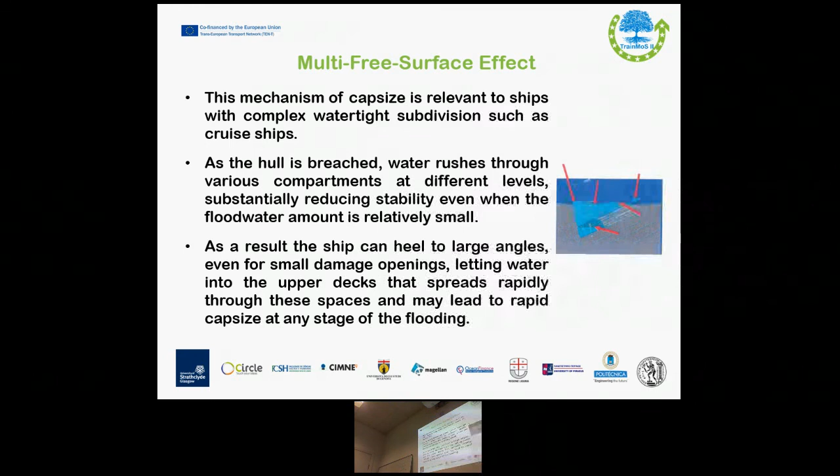Then we have different levels, and the water coming in will go into different compartments, and we will have free surface effects, which will deteriorate and reduce the stability, eventually leading to rapid capsize at any stage of flooding.

This is the available regulatory instruments we have. In SOLAS 74, we had the one-compartment standard, meaning the vessel was safe from sinking or capsizing if one compartment was breached. Then in SOLAS 90 we have the two-compartment standard, proving the vessel would be able to withstand sea states up to approximately 3 meters for ro-ro vessels.

Then we have the Stockholm Agreement, where we made sure that vessels would be able to operate even at 4 meters significant wave height, existing at the time of the incident. They then harmonized in SOLAS 2009 the probabilistic concept, which is equivalent to SOLAS 90.

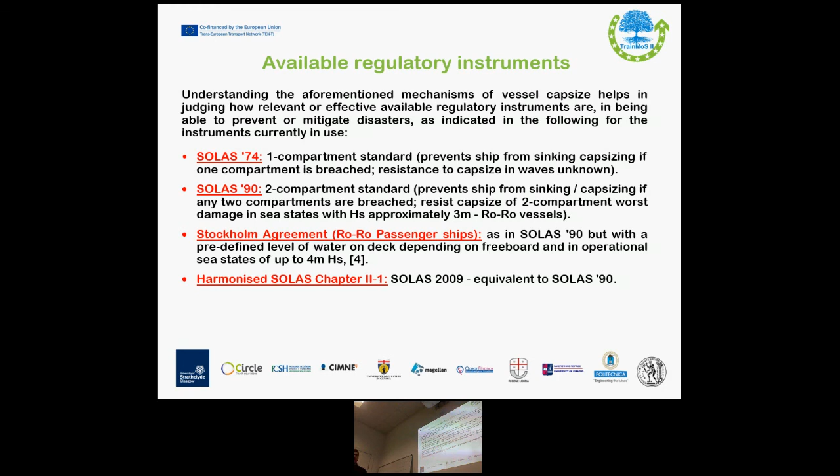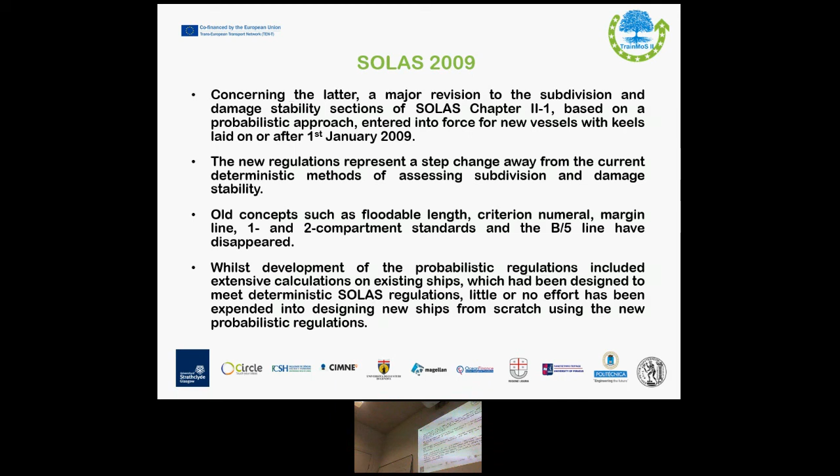For SOLAS 2009, we will discuss more details later on, so we will not get into more details right now. Thank you for your attention.